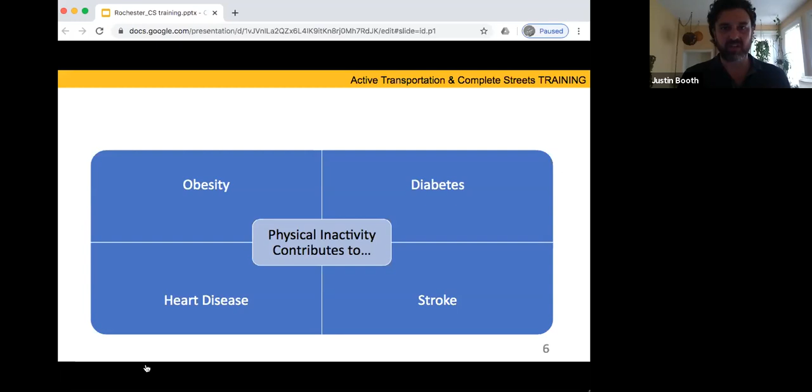We do know that across the country and here in New York State, obesity continues to be on the rise. And when we talk about complete streets, oftentimes the argument about why we can't do it is because of cost, and we focus on the direct cost of building a roadway. But when we look at the indirect costs of how we design our environments and how it's affecting people's health, the New York State Comptroller back in 2011 did a report about the direct and indirect costs of overweight and obesity in New York State, and determined that childhood obesity is costing New York State $327 million in direct and indirect medical costs. And when you look at adults, that number jumps to $11.8 billion. So there's a direct benefit for us to really design our streets for all people.

When we take a look at the way people are traveling, we know that commute times are certainly increasing, oftentimes due to congestion. But we know most of our mode share in New York State is done by car. Here in the city of Buffalo, there was a survey done by the Business Improvement District downtown that determined that 88% of the trips made into downtown Buffalo are done in a single occupancy vehicle. And of course, trying to accommodate all those cars every day as we continue to grow and our downtown starts to rebound becomes more and more challenging. Competing interest for space and resources, whether it's on the streets or off street for parking, can really have a negative impact on our community.

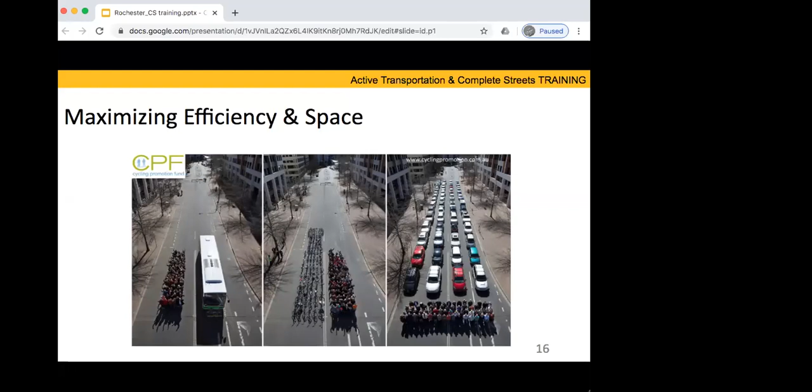However, that metric doesn't take into account people, just vehicles. So that metric will account for a bus carrying 30 to 50 people the same as a car carrying one person. When we think about the spaces devoted to vehicle travel, what we need to start thinking about, and what we've seen communities around the country and the globe thinking about, is how we're maximizing the efficiency of the space on our streets to move more people through our corridors, as opposed to just moving more cars.

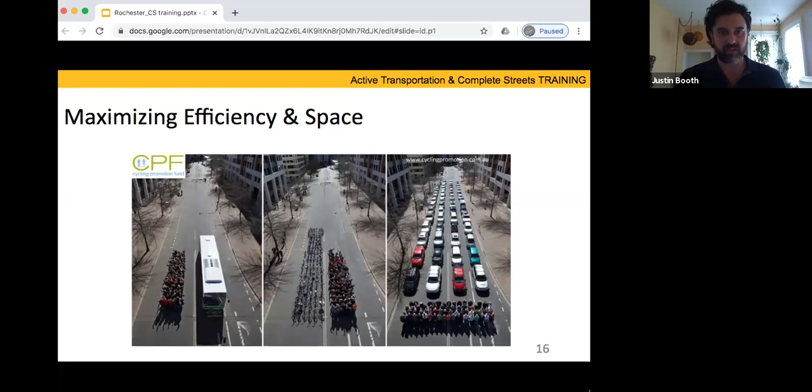Of course, one of the biggest challenges we see in all our communities, and a place where we need to put a lot more effort, is the impact of transportation on climate change. Transportation accounts for 34% of New York State's emissions, more than residential, commercial, industry, and waste combined. When we think about transportation's impact on climate change, it's a three-legged stool: vehicle efficiency, fuel content, and vehicle miles traveled.

While we're making progress with electric vehicles and fuel efficiency, vehicle miles traveled continues to climb, because the way we've made it more accessible and convenient to drive drives people towards that mode and reduces demand for other modes, where many of our communities are looking for a much larger impact from so many other options.

We also need to consider equity in our planning. I know in many of our communities there's upwards of a third of households that don't have access to a vehicle. How are they getting around? Think of a family with a household income of only $30,000 a year, with AAA having the average cost of owning and operating a vehicle close to $9,000 a year. That's a significant portion of household income going towards transportation.

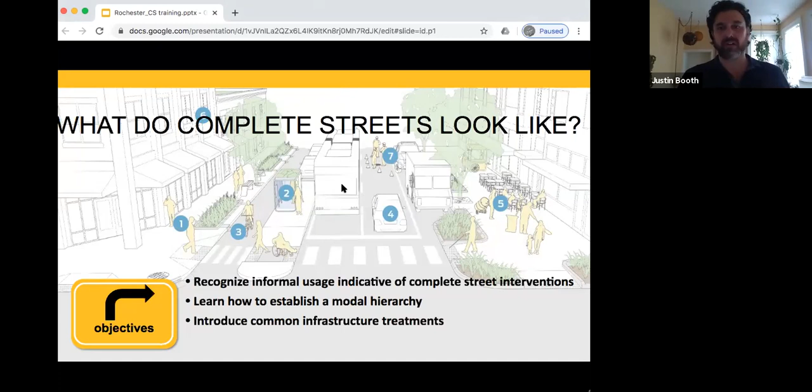So what do complete streets look like? We're going to look at recognizing informal usage indicative of complete street interventions, learn how to establish a modal hierarchy, and introduce common infrastructure treatments.

Whenever we go out and look at a community, we need to recognize patterns. It's so important to observe the environment and how people are interacting with it. Are there goat paths? Is there a sidewalk adjacent to the street, but a worn dirt path set back from it because it's in a splash zone? Are cyclists taking shortcuts around certain locations because while there may be a bike lane, the intersection it crosses may not be the most comfortable or safest to get through?

Is there a community interest in a path or street treatment? Has the community been asking for a crosswalk or a pedestrian signal at the location? Many times there needs to be a certain amount of pedestrians to warrant having those in place, but if it's unsafe to encourage people to actually walk there, it's very difficult to justify adding some of those.

And of course, where are the kids going? Where are they hanging out? Where are their destinations—the playground, the school? And how are we supporting safe travel for them?

When we think about complete streets, I like looking at it as the 3 Ps: projects, policies, and programs. In projects, we want to develop and build an environment that supports all modes. So many projects, whether large-scale infrastructure or quick build projects like painting bump outs and crosswalks with neighborhood groups, really make an immediate difference in impact on street safety.

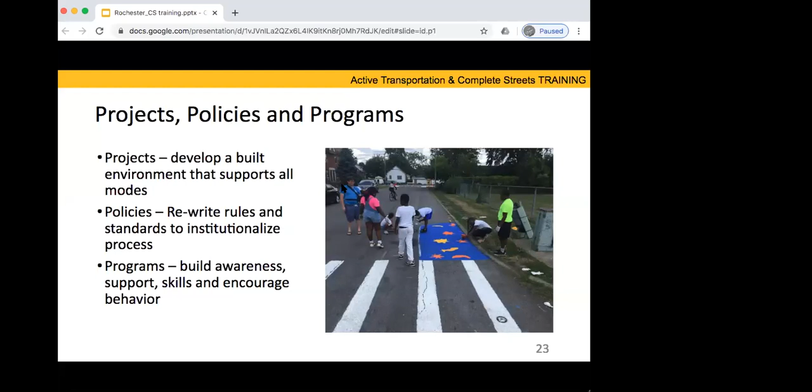What policies are in place to make sure we institutionalize these processes to support all modes of travel on our streets? It's also important to build awareness through programs, encouraging correct behaviors on the streets, educating road users on new treatments being put in place, and encouraging correct behaviors.

So correct design invites the correct use. This is from Clyde, New York, if anyone's been to Wayne County. These streets run parallel to each other—one had investment from a TAP grant to do complete streets interventions, and the other was just repaved. You can see through these images the street widths are exactly the same, but simple elements such as street trees, light posts and signage, high visibility crosswalks, and ADA ramps really shrink the perception and encourage cars to travel at the speed limit.

Whereas the image to the right just looks very wide, like you could land an airplane on it, which really encourages vehicles to speed. So how do we clutter the environment in a way that changes the perception of drivers and encourages the correct use?

This image is from Lake George, upstate New York above Albany. We did a workshop in Lake George a number of years ago, and this is the roadway once you get off the thruway coming into the village. The speed limit was 50 miles per hour. It was a 4-lane roadway. The sidewalks were immediately adjacent to the road. I was staying right there at the Fort William Henry Hotel, and for dinner I had to run across the street as carefully as I could to get to the restaurant.

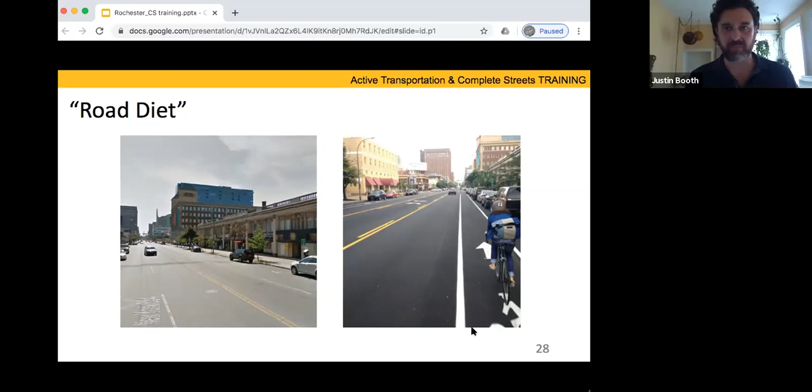So maintenance projects can provide a significant opportunity to make some low-cost changes on our streets that are going to have a significant impact on safety.

In many of our communities, we're starting to see the implementation of protected bike lanes. The image I showed you before of Delaware Avenue had the bike lanes on the outside of the parking. Instead of using bicyclists to protect parked cars, many communities are now using parking as a way to protect cyclists. It's a shift in the way that we design our streets and has some additional design considerations.

When we think about inducing demand for other modes, we know that 1% of the population are what we would consider strong and fearless cyclists - people like myself that are going to ride on any street year round and take the lane, more vehicular cyclists that are out there. Bike lanes are going to attract about another 7 to 8% of the population by providing that safe designated space.

However, if we really want to make a significant difference in terms of changing mode share, improving public health, and some of the other benefits that we talked about with complete streets, protected bike lanes have shown to attract upwards of 60 to 70% of our population, making it safe for families, for children, and have really demonstrated an increase of safety of upwards of 90% in the communities that have measured the impacts on these streets.

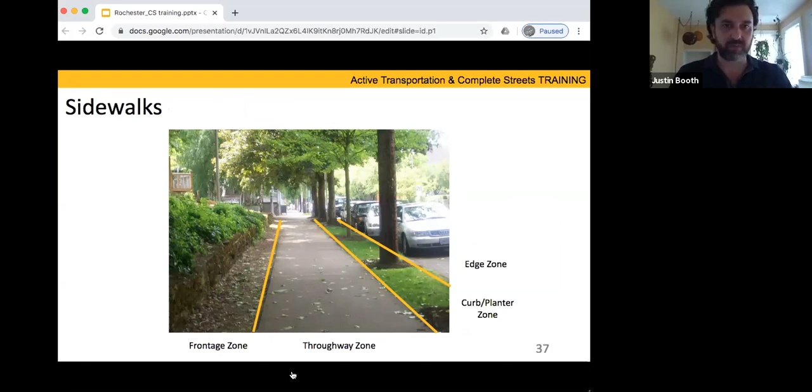Curb extensions are a key aspect of shortening crossing distances for pedestrians. It's New York State law that vehicles can't park within 20 feet of the crosswalk, but without curb extensions we all know vehicles will park wherever they can find a spot, which often reduces the ability for drivers to see pedestrians at intersections and makes it difficult for people to cross the street. So curb extensions are a great treatment, whether at the intersection itself or mid-block, slowing vehicle speeds down and creating sight lines and improved visibility at the intersections.

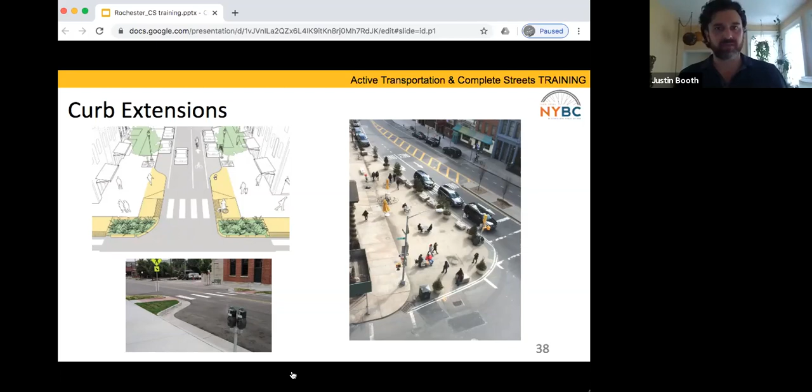High visibility crosswalks are incredibly important, making sure drivers know where pedestrians should be crossing and that there's a clear zone for them to do it. Sometimes in communities they can be enhanced at nighttime with crossing beacons or in-pavement lighting. High visibility crosswalks with the ladder bar pattern are incredibly important to improve the crossings at our intersections.

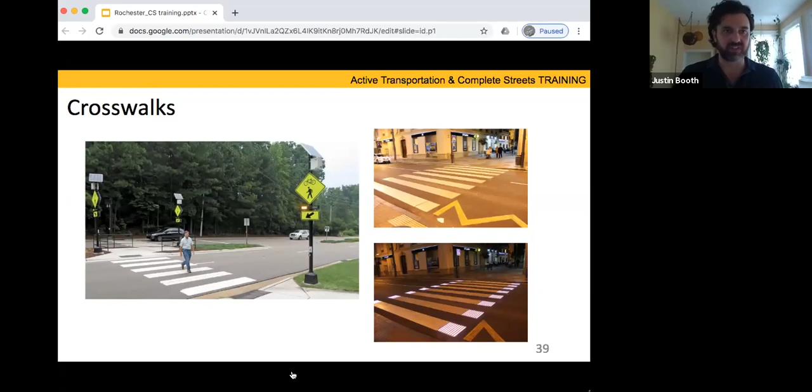At schools, the rule in the past used to be putting bike racks off to the back near the dumpster so they aren't seen, which is usually the worst place to put them because that's the easiest location for bicycles to get stolen. So we're seeing many schools now put bike racks up close near the entrance of the school, which lessens the likelihood of vandalism or theft occurring.

And of course, ADA accessibility, making sure that we're accommodating all users on our streets, people that are mobility impaired, making sure that we have correct corridor design, grades and slopes that support all people, appropriate sidewalk surfaces. We have truncated domes at intersections for people that are visually impaired, with appropriate curb ramps and other pedestrian crossings in place.

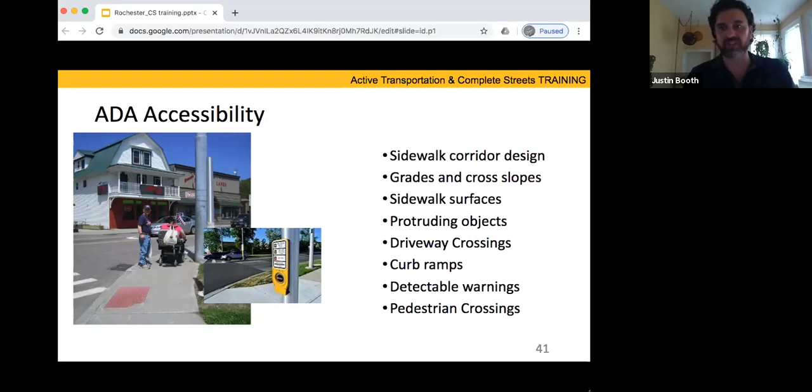And of course, never underestimate the opportunity to be creative in our streetscapes, adding public art, placemaking, and creating that flair. I think one of the best treatments I've seen or experienced was in a community called Fremont in Seattle.

On their main street in their business corridor, they put in bronze dance steps. As we were taking pictures of these great public art pieces, an elderly couple walked up and just started following the dance steps put in the middle of the street, just for fun, right? Our streets are places to interact, places for public art, places to build character and community and quality of life. So utilize these aspects to your benefit when looking at streetscapes, to make them more comfortable and attractive for people to use.

The city of Rochester has done a great job of doing some really creative public art in our intersections themselves. And I think that's a model that other communities have strived to do as well, utilizing our streets as a public space that is not just for movement of people and goods, but also for creating that sense of place.

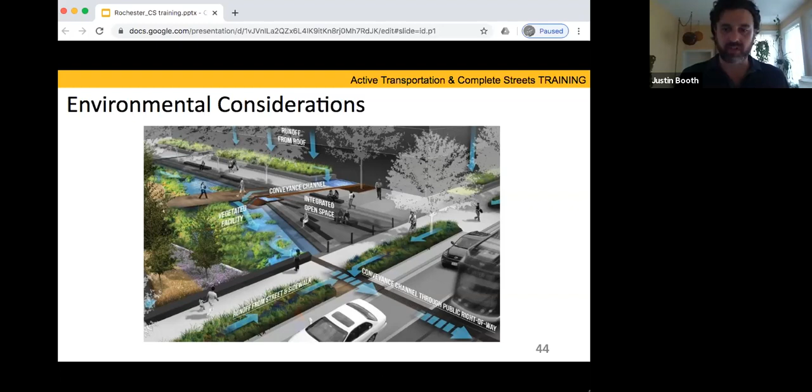Environmental considerations: making sure that there are opportunities where appropriate to capture our stormwater, whether through rain basins between the street and the sidewalk, or other opportunities such as porous asphalt, or using plants to absorb the water as much as possible, so that during large rain events we can prevent pollution running into our water systems.

So there's lots of resources out there, and I would highly encourage all of you to take a look at the National Association of City Transportation Officials. They've developed quite a few design guidelines, and most recently came up with another guide called Don't Give Up at the Intersection, looking at bicycle and pedestrian infrastructure at intersections, new treatments like protected intersections for both cyclists and pedestrians, which a couple of communities have been implementing. AASHTO has developed a guide for development of bicycle facilities and protected bike lanes, and there's constant work and studies funded through the New York State Energy Research and Development Authority, with examples we're seeing across New York State. There are quite a few resources out there, and we can certainly share some of the ones we use most often with all of you as a follow-up.

I'm missing some of the elements of the slide.

Integrated transportation systems. One of the things I think is important is that sometimes we silo different modes in their own spaces, whether it's vehicles, transit, bicycles, or pedestrians. What we're really trying to look at is how do we integrate our systems together. How do we encourage more people to use public transit when we know that the first mile, last mile is probably a critical factor in whether someone's going to take public transit? Is it safe to walk to that bus stop or transit line?

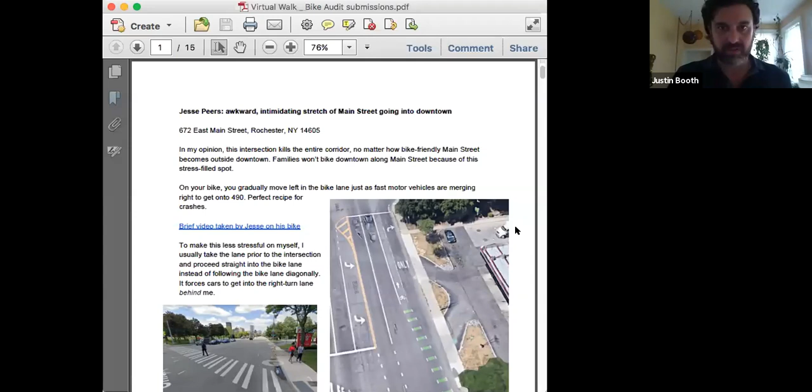So Jesse, you've compiled these and articulated some opinions on the impacts or challenges of some of these locations. Do you want to introduce this first one here at 672 East Main Street?

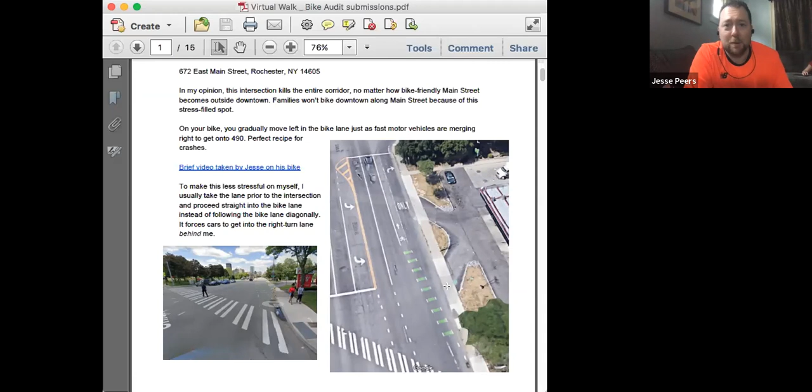Sure. So the default east-west corridor for people getting into and out of downtown is Rochester's Main Street. Gradually we are seeing some improvements, particularly between Culver and Goodman. We're going to see a great cycle track that'll be constructed soon. But this little piece right here going towards downtown from the city's east side, to me, it kills the entire corridor. It's a very weak link. It's very uncomfortable, and I use it a lot, but I'm never comfortable there. I can only imagine other cyclists having a traumatic experience here and vowing not to bicycle ever again on Main Street.

But as you proceed into downtown, you see that bike lane with the dotted green stripes that has you gradually move left just as faster motor vehicles are trying to merge right to get on the inner loop there, 490. So it's a really stressful spot. To make myself less stressed, I tend to take the lane prior to the intersection and proceed straight, which forces drivers to merge over behind me rather than in front of me. But it's just a very weak link, and no matter how bike friendly Main Street becomes outside this space, I worry that this weak link will just deter people from biking down Main Street.

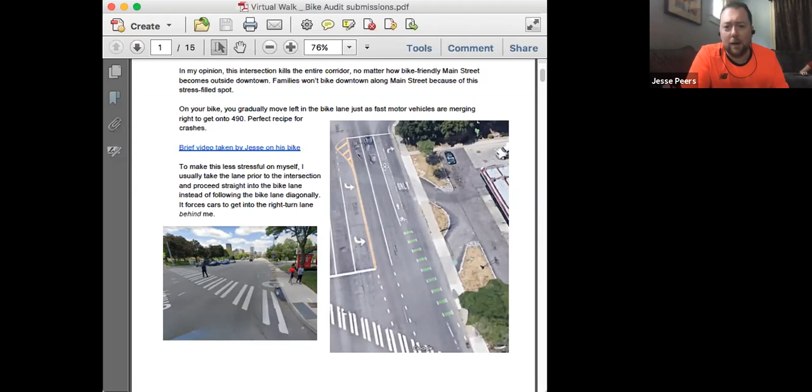Has anybody else had similar interactions with this intersection, or have some suggestions of how to make it better?

Jim Pond here from Monroe County DOT. That's a relatively new installation, as you probably know. So in order to understand that one, we have to back up a block to see what's in the preceding block, to see where that's coming from out of a bus stop and so forth. So Jesse, this is a difficult spot to do as a system, because if you move the bike lane over prior to that, then you're hung out in the middle one intersection earlier. So I'm not sure how to fix it, and I understand exactly what you're saying, but it is a difficult spot to work with. This was put in on a resurfacing project, so they had to stick with the same curb width—they couldn't bump it out and open up the right turn pocket, which probably could have made it more like what you're looking for.

Jim Jones, can you maybe talk about some ideas? Thanks, Justin. Let me turn my camera.

Yeah, this is actually the recommended treatment where the bicyclist continuing straight takes that space, and this conflict zone is there. It's part of that conflict, but I don't really know a good way around this. I don't know what the right turn volume is. I'm assuming if there's a dedicated right turn lane, then it is warranted.

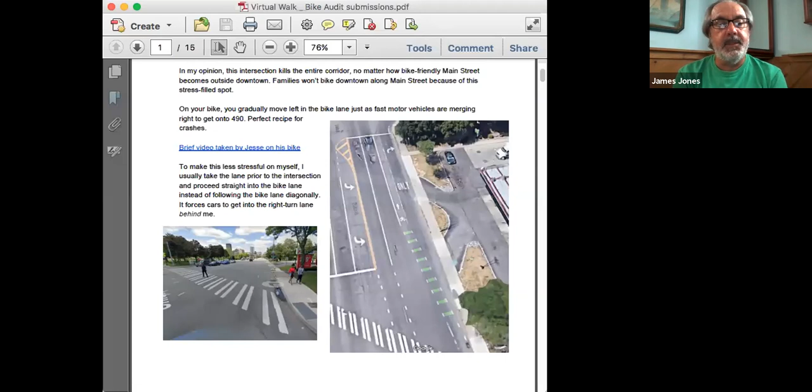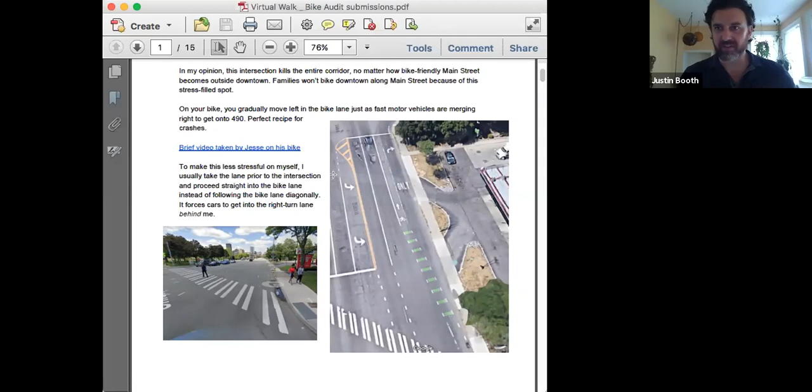Any other comments on this first walk bike audit piece? All right, I'll move on to the next one. Jesse, this is also your submission.

Yeah, so I bike with my kids all over the city, to Little League baseball fields, to the library, to museums, to parks. And we love bicycling to Rochester Red Wings games. I look forward to having minor league baseball again. But it's always very stressful getting to the baseball park, particularly because of State Street.

And I just wanted to draw attention to the tweet there in the middle of the page, which is a very common experience that people have. And the tweet says, 'Oh my God, my daughter just called from an intersection crying. Bike lanes ended. She took the lane, but it was too busy and intimidating to turn left. Cars were honking, people yelling at her. She vows never to ride a bike again. Wife has gone to get her in the van. Hashtag gutted.' And that's just a very common experience.

I know people that I feel kind of guilty about because I encourage them to bicycle. They had a traumatic experience like this, and they're very reluctant to try biking again. And Andrews Street getting to State Street in Rochester is just very uncomfortable. I would love to see a family-friendly way for people to get to Frontier Field.

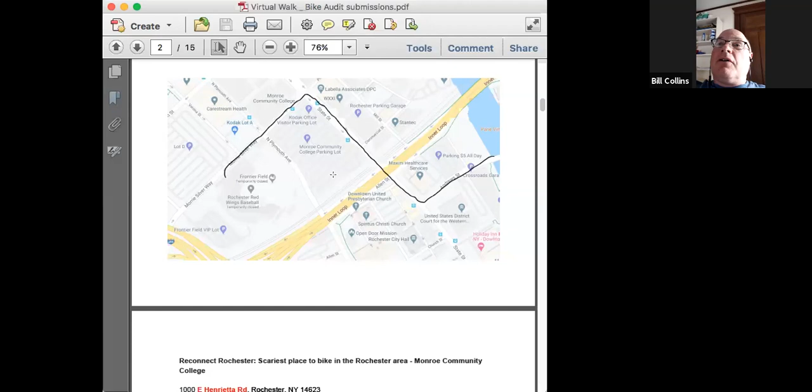Hey Jesse, this is Bill Collins. I guess if I was doing that route, I would go up St. Paul instead, and then go across the pedestrian bridge, and then straight over to the field from there. Just State Street and Lake Avenue in general is just a horrible place to bike. And I don't know, since it's a state highway, we've had very severe problems getting the state to change it or reduce the width in any way. So I don't know what the solution, if there's any solution to State Street at this point, State Street and Lake Avenue, except to avoid it, which is what I do constantly.

Yeah, it's such a contrast to Andrews Street, which is so bike friendly. If people want to go through or around downtown, I always recommend Andrews Street. It's relatively low traffic, they've got bike lanes, and there's some beautiful vistas of the city skyline. But when Andrews ends and you get to State Street, it's like, oh crap, totally different experience. So yeah, it's a tricky spot.

Yeah, this is Scott MacRae. Justin, are you going to talk a little bit about signage? Because identifying bike-friendly streets or pathways for people not so familiar with the navigation can be really helpful. It seems like an area where we could really benefit a lot for relatively little dollars.

Yeah, that's certainly a good point, Scott. Getting some of that low-hanging fruit options, signing some of those better routes, encouraging a safer route until we can make some of these longer-term improvements along these corridors.

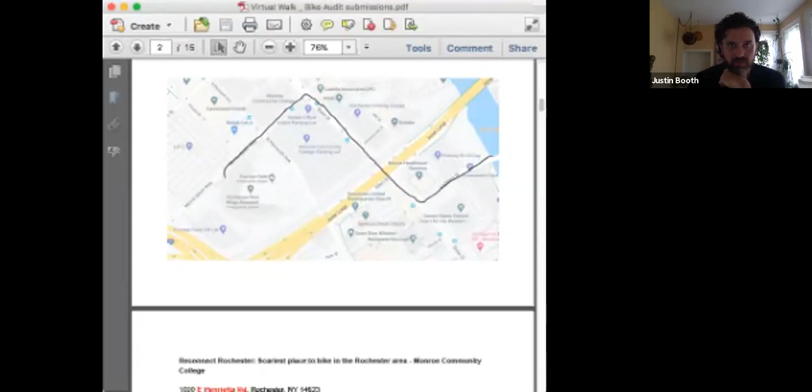I'm going to switch over to Google Maps real quick. For those of you who aren't familiar with the intersection or location we're talking about, if we can—beauty of Google Maps. So it's certainly, am I in the right location? Yeah.

So what we can see here, do we know what the traffic volumes are on State Street? Not enough, fast, busy. It looks like, the intersections themselves, we're looking at 4, 5, 6 lanes of traffic roughly that you would need to cross to get across State Street. You've got a large parking lot at this location at State and Commercial across the street. Not knowing the area as well as some of you, this really looks like a location that's facilitating vehicle and vehicle speeds.

And so this is also often the challenge, right? If the volumes are below, say, 15,000 AADT, that's typically the threshold where state DOT, according to the state's complete streets policy, will be able to do a road diet. So sometimes it's, do we want to continue? Part of it is, are we going to make a conscious decision on some of these corridors to reduce traffic volumes or inhibit traffic volumes and really focus on other modes?

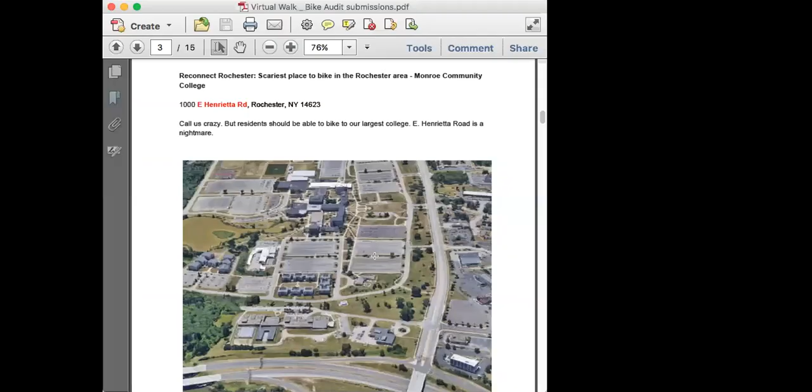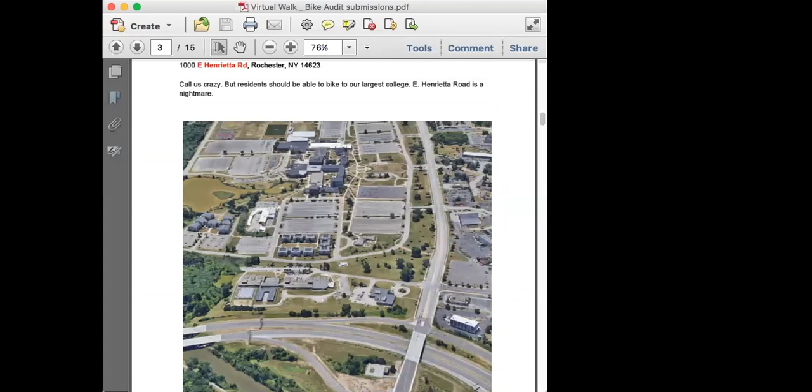All right, Jesse, this was also a Reconnect Rochester submission. Yeah, so going from one MCC campus to the other, the Rochester Cycling Alliance has for over a decade been getting a lot of complaints about East Henrietta Road, where the Monroe Community College campus is. It's our metropolitan community's largest learning institution, and it's harrowing to get there on a bike. East Henrietta Road is just very uncomfortable, very wide, with lots of traffic.

There's a 390 exit ramp and entrance ramp right there. I know cyclists that go through that intersection all day—they typically have to dress like a radioactive My Little Pony and wave their arms and yell and scream just to make themselves feel seen and heard. And again, it's our community's main learning campus, not that far out of downtown. I know people would bike to it, but not on East Henrietta Road.

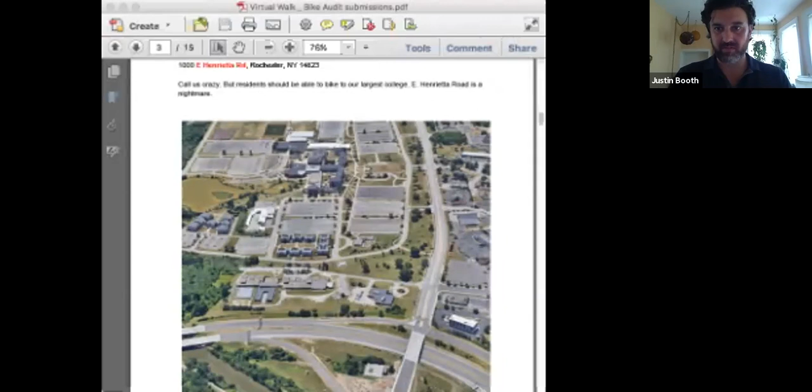Is there any projects coming up for East Henrietta Road? Do we know of any? So I'll pull up and share screen. Depends on where you are on East Henrietta, but I think the stretch south of 390 was rebuilt about 8-9 years ago with bike lanes, though it's wide. They're doing work just inside the city limits on East Henrietta Road now, between 390 and Westfall, to add bike lanes.

You're down south of here—that was 8-9 years ago, so it's probably not due for a project for a while. There are bike lanes there, or shoulders—I'm not sure, I think they're just provided as shoulders, but it's wide.

Yes, I pulled up just the entrance to the school. Again, 1, 2, 3, 4, 5 lanes of traffic. I presume the speed limit's 30 miles per hour, but probably speeds exceed that. It's 40—yeah, it's 40.

I think one of the questions asked of us to cover was the 85th percentile, and for those that aren't traffic engineers, that can sometimes be a little confusing. So, Jim Jones, I'm going to ask you to give your take on the 85th percentile and how it works or doesn't work.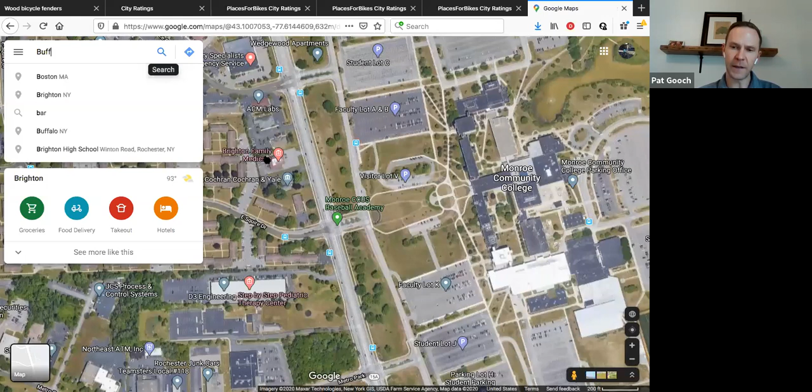Yeah, I think this is a great opportunity, and we need to do this along all of our campuses in the SUNY system. They often have large front lawns that are just grassy areas and could be a great two-way cycle track facility. Buffalo, New York was fortunate to do this with Buffalo State College along Elmwood Avenue. The same type of thing could be done here, even for a short stretch. I think we need to think bigger than just an on-street bike lane—we need an off-street facility that will be top-notch. I'd encourage people to think a little bigger on a project like this, especially when there are state facilities that we all pay for.

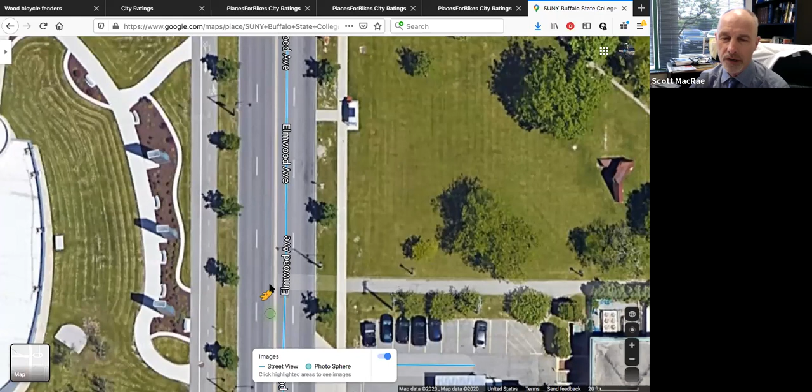This is Scott MacRae. Just a quick comment—Jesse kind of nailed it when he talked about the sort of armored pathway you need to get across that expressway. This is a really common problem of pinch points where there's an expressway entrance, and I find they're the most dangerous because drivers aren't thinking about pedestrians and bicyclists popping up when they're trying to enter an expressway. The intersection at 390 and East Henrietta was just redone, but it was window dressing from a cyclist standpoint—it's not at all friendly.

When you have those pinch points, even if you do a great job on the Monroe Community College campus, it's very difficult to get across. I live not far from Culver, at the intersection of Culver and 490, and that's another pinch point. There's a wonderful park right there, and it's very difficult and actually dangerous for pedestrians because people are always coming off that expressway looking left while there's a pedestrian on their right—they don't see them, and you have to be very careful.

Do you want to talk a little bit about pinch points? It would be a major work to somehow separate bicycles. We talked about having a little underpass, separated, that John Schull proposed for that intersection to get to MCC, but that's a pretty significant infrastructure investment.

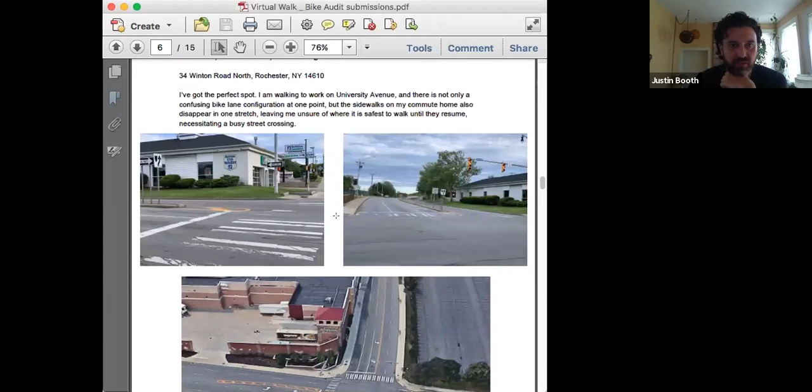All right, we'll go on to Robin Wilt from the town of Brighton. Are you available to speak on this location? We have Robin on the call.

So Robin stated: walking to work on University Avenue, there is not only a confusing bike lane configuration at one point, but the sidewalks on the commute home also disappear in one stretch, leaving me unsure where it is safest to walk until they resume, necessitating a busy street crossing.

And so we could see the overview of this location. Obviously, I think one of the key aspects here is that you've got the land use, you've got the three intersections where you've got buildings up to the street wall, but also a significant amount of parking on the upper right-hand side of the bottom image. Number of lanes to cross, despite having high visibility crosswalks. And I think something important to take a look at is the curb radii. One of the things I often find challenging in intersections like this is it facilitates cars taking right-hand turns on reds, unless there's a signal in place. So as a pedestrian tries to cross, it makes it even more challenging to get across the street when cars are making that right-hand turn.

So again, I'm going to turn this over - anybody else? Jim Jones, can I ask you for a couple thoughts on this? Yeah, so this is the traditional approach to an intersection or a project: widen it, provide exclusive turn lanes, but we're only looking at benefiting the vehicle, the automobile. So there's a competition here for safe pedestrian access, and there's no accommodation for bicycling here at all.

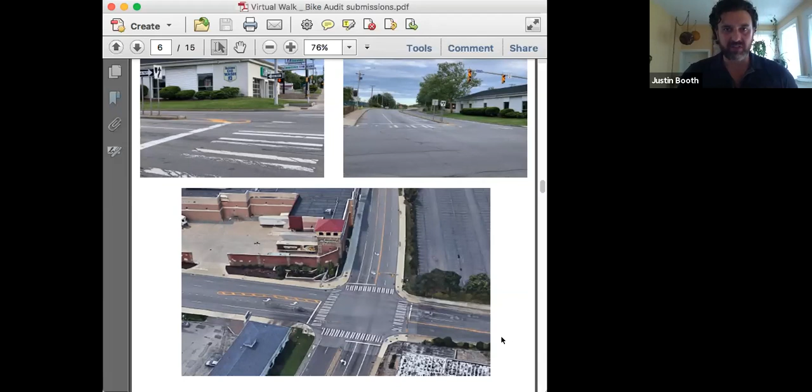I do recognize, I saw at the bottom image that there is a bike lane going down there, but I didn't notice it connecting to the end. It doesn't really seem like any of the locations there necessarily connect to that bike lane, nor are any accommodations made at that intersection for potential cyclists. The sidewalks that exist look fairly large, but I can imagine not necessarily comfortable to walk down, considering there isn't a buffer between the sidewalk and oncoming traffic. And with the volumes I presume are there, it could often be just not comfortable.

So again, thinking about our roadways and how we're accommodating pedestrians and cyclists, providing a sidewalk is great, but if it's not comfortable to walk on, we see this many times - we won't see anybody actually utilizing it. And so that's something we need to address.

Yeah, it looks like, Justin, there is a two-way center turn lane there. That's another common legacy approach to providing that factor of safety or accommodation for turning vehicles. But there you're sacrificing 12 feet probably that could be provided to bicycle facilities.

There's no sidewalk on the lower left corner there - it's all green lawn. So there's no sidewalk there, and the sidewalk on the other side of the street looks very narrow, and there's no snow storage. This has been widened probably to accommodate that left turn center lane.

And those, in certain contexts, especially in an urban context, I would hesitate from their use, because they do take away from the bicyclist's opportunity and the pedestrian, and they increase crossing distance and crossing time. So then you've got to adjust your signal timing for those additional pedestrian calls.

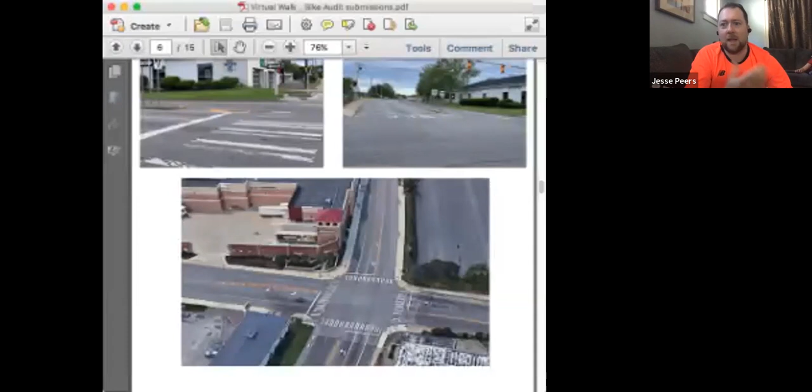Robin was also drawing attention to the fact that the bike lanes disappear prior to the intersection, and I know even the League of American Bicyclists up to pretty recently had advised municipalities to make bike lanes end prior to intersections so that cyclists could merge over into regular traffic. Justin, can you talk very briefly about right hooks and left crosses and what's being done around the country to prevent right hooks and left crosses?

Yeah, I'd be happy to. I think the best guidance I've been seeing is really coming from the National Association of City Transportation Officials, their guide, Don't Give Up at the Intersection. I'm in the process of pulling it up right now. I'll share my screen with you all.

But again, it really looks at how do we make our intersections safe to reduce those conflicts, which can be so detrimental, and really be the place where we lose our access at the intersections. So I'm just going to stop sharing on that one.

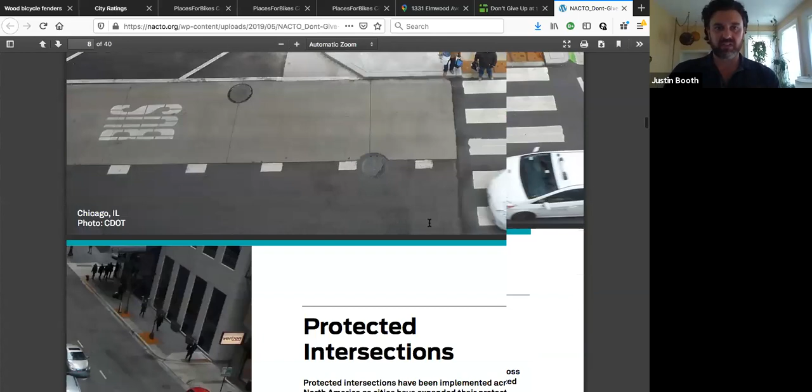So this guide does a lot. You can see here the little island that is used to change the radius of the intersection for vehicles. That's really the key component to this. So it's essentially thinking about putting out a bump out, but only doing the small little piece of it as a way to provide the through traffic for all modes.

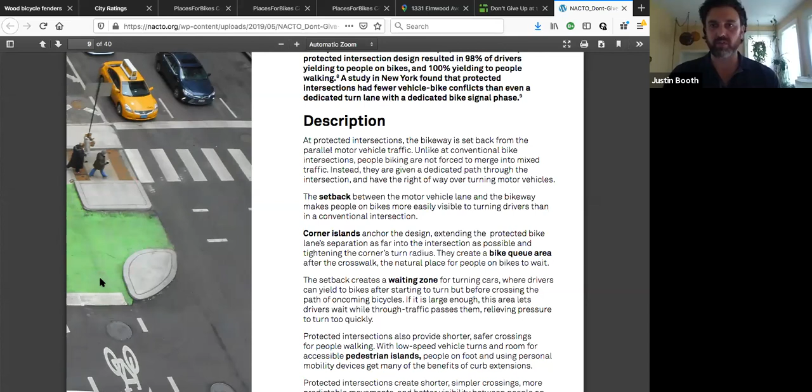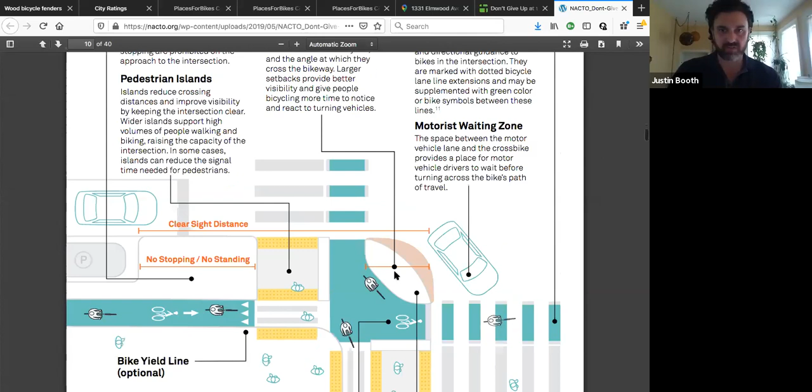They give really great guidance in terms of the stopping, the standing zone, pedestrian islands, the bikeway, setbacks, crosswalk markings, the motorist waiting zone, which is incredibly important. It's all about making sure we provide clear sight distances for all users at the intersection. It makes a significant difference.

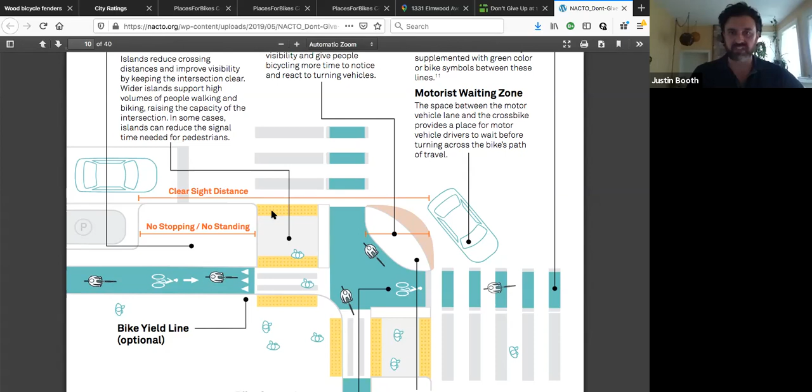This doesn't need to be all that expensive. There's a lot we can do. If we have the original curb line, a lot could be done with paint, plastic delineator posts, or maybe a small cement island that can make a significant difference at those intersections. We'll include this in some of the resources we send along to everybody.

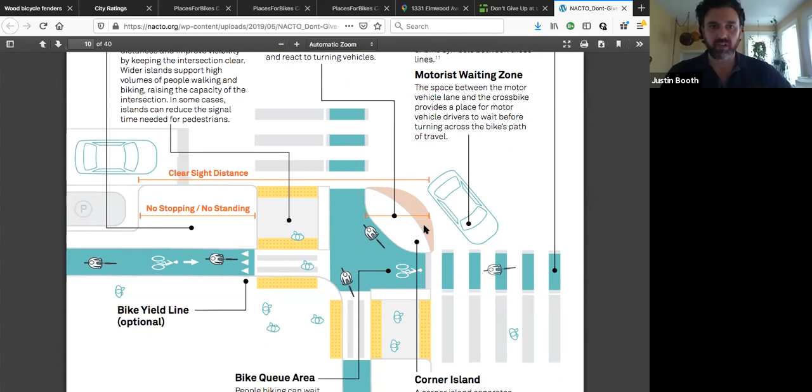All right, let's go to Patrick. You want to talk about this intersection you shared?

Yeah, so this is South Clinton and Goodman. Everyone's probably aware of it. It's a busy intersection, a lot of traffic, a lot of streets coming in at odd angles. I live just south of here, and I rarely go up north towards the Park Ave area on a bike because of this intersection. It's just not an easy place to get across, and I would imagine it limits lots of other people in the directions they choose. I know it's something that a lot of people know needs to be improved, but with the traffic volumes and other things, it's tough to do. It's just something that really would help connect parts of the city back together if it was easier to traverse.

Jim Jones, your take on this intersection? I think I know what you're going to say. But my first instinct is this is begging for a roundabout here. There's a parking lot in the lower right-hand corner, looks like there's a building in the center, lower center. A roundabout here could be considered, and it's hard to say how many lanes this is—4 lanes in each direction plus left turn lanes, so 5 lanes. I don't know what the volumes are.

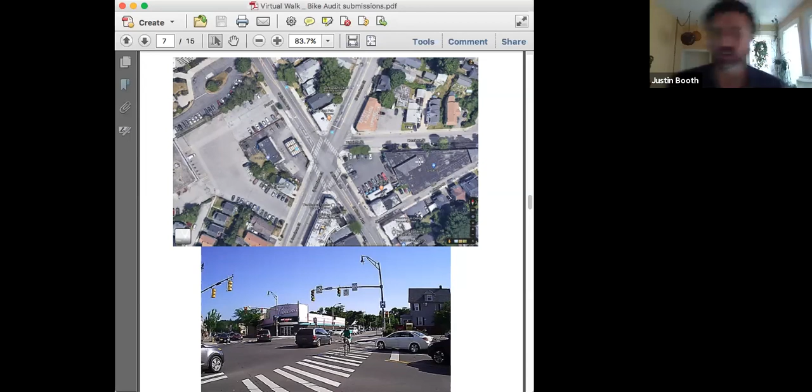So Pat, any other thoughts on this intersection, the cycling problem or opportunities to maybe improve it? I mean, if you live here, I'm sure you've had some thoughts about things you'd like to see done. Unfortunately, I don't have very many creative thoughts to solve the solutions.

The cycling problem is that it creates an area where, at least, and I'm a pretty advanced cyclist, I commute by bike most days, but I don't like to go through this intersection. I avoid it at all costs. That's the cycling problem, it creates a bottleneck and a block for me at least. But the solution, I don't see many because it's a very tight land use issue there. My main solution would be to reduce the number of lanes at that intersection and create a dedicated, protected bike lane. I don't know if that would work volume-wise, but that would be my easy solution.

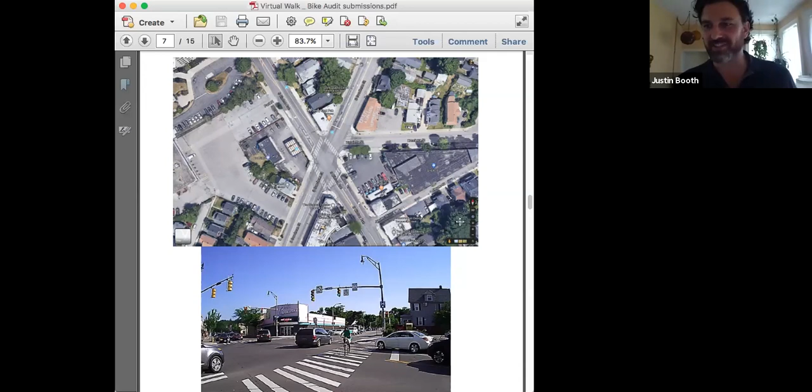Yeah, you guys gave us some really good, challenging locations to consider during this virtual audit. All right, let's move on.

Art Clayman, from Schenectady, you've submitted some spots here. Are you available to speak on them?

Is this by chance an older section? Because we don't have a Schenectady in our area. This got opened up to some folks outside of the Rochester area, so I believe this is a Schenectady, New York.

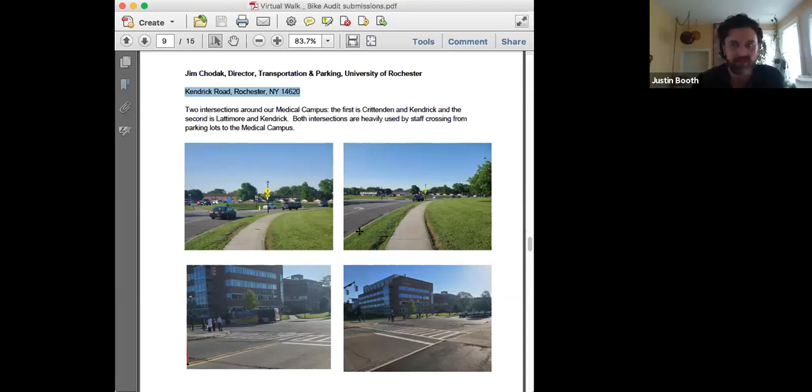Jim, we have lots of Jims today. Jim Chodak, Director of Transportation and Parking at the University of Rochester. Are you here on the call to talk about intersections around the medical campus? Jim had to jump off. This is Andrea Walton, also from the university.

I think where he was going with this - these are both intersections that come from our staff parking lots along Kendrick Road into the medical center. Both intersections have different issues. The one at Kendrick and Crittenden seems to be a slower intersection for vehicles, as there's a median on Kendrick that slows vehicles down. But there's so much volume of staff members crossing to get to the medical center that they'll do just about anything - they don't wait for lights, they just walk. There's been a lot of accidents at that intersection.

And then the other one, at Lattimore and Kendrick, is a different issue. It's the next intersection up, and vehicles speed up because they're going to turn onto 390. There's lots of near misses with pedestrians there, as there's a crosswalk right there.

I'm going to pull up the intersection at Crittenden. All right, Jim Jones, you're up.

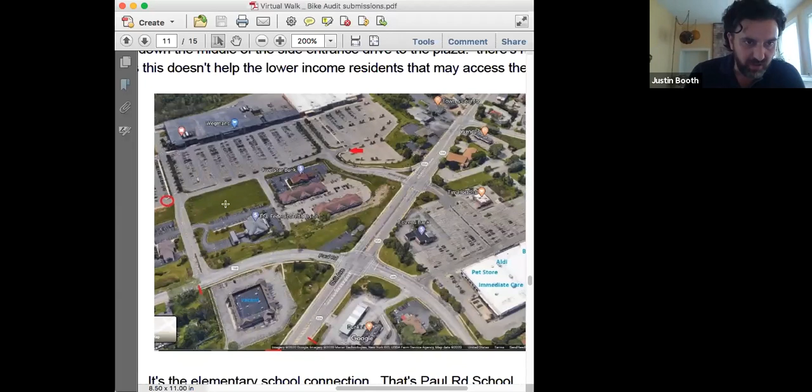Let's see if I can get that a little bit larger here. It looks like those red marks are there. So yeah, a number of challenges in this location as well.

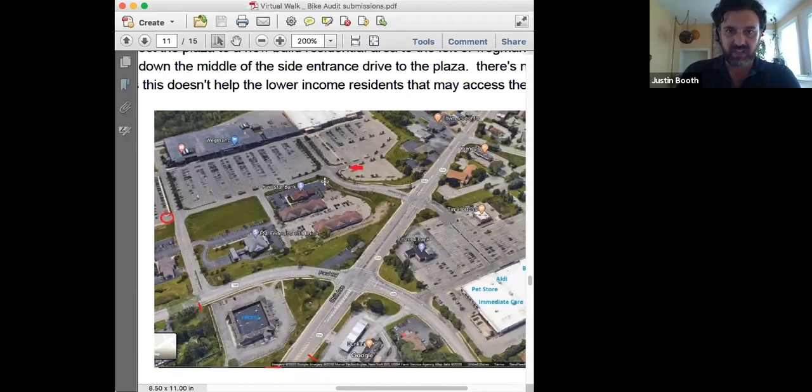I think it's important to look at the context and land use. A lot of the submissions have been primarily of a suburban nature, auto-dominated infrastructure uses, very large setbacks from the road with parking dominating a lot of these corridors, and pedestrian accommodations are some of the last aspects that have been kind of squeezed in.

Certainly not making this an attractive and safe place to walk. And again, when we talked earlier, Jim made the point of talking to our transportation engineers or public works departments, we also need to work in tandem with the planners developing our land use codes, zoning codes, and comprehensive plans.

And looking at these spaces and the opportunities in these spaces to really change the way we've built the land use patterns here, which is dominated by moving vehicle traffic, to really kind of being more pedestrian scale and pedestrian oriented for people.

So I think the land use challenges with this location and some of the others is what's driving the safety concerns. And of course, as I mentioned earlier, there are sidewalks and crosswalks provided, but it's not the priority movement or vehicle that's provided to access these locations. So I don't know, Jim Jones, do you have any other additional thoughts?

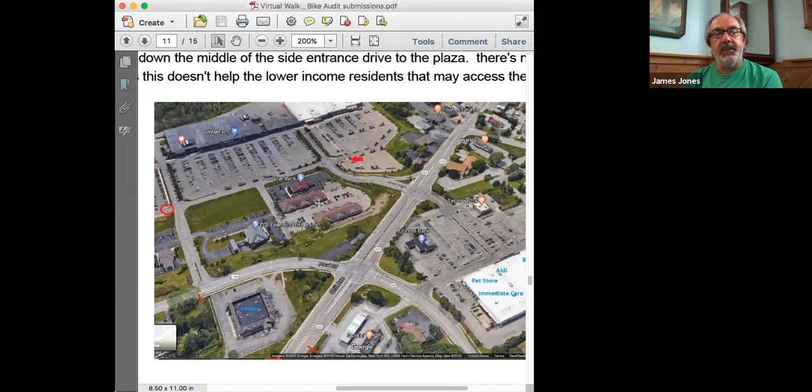Maybe it wouldn't hurt to put a bodega on the corner of your residential street, so you could have a grocery store or a coffee shop or a bakery or a butcher, so you could get locally sourced food. So it's hard to think of this just in transportation terms, because the land use here dictates everything.

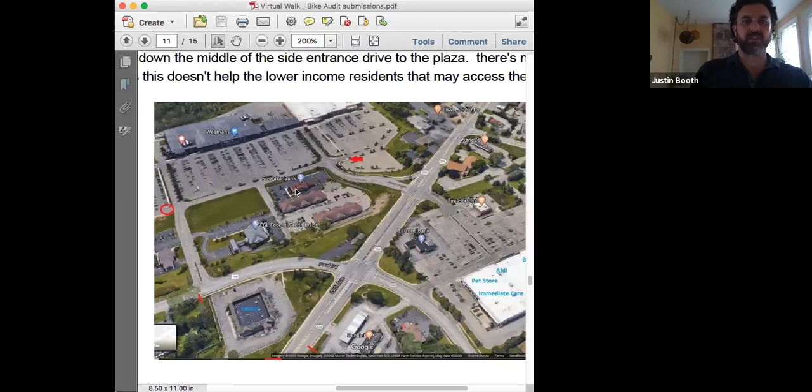Kiernan Playford, are you available to talk about your submission? This looks very similar to the one that Pat shared earlier.

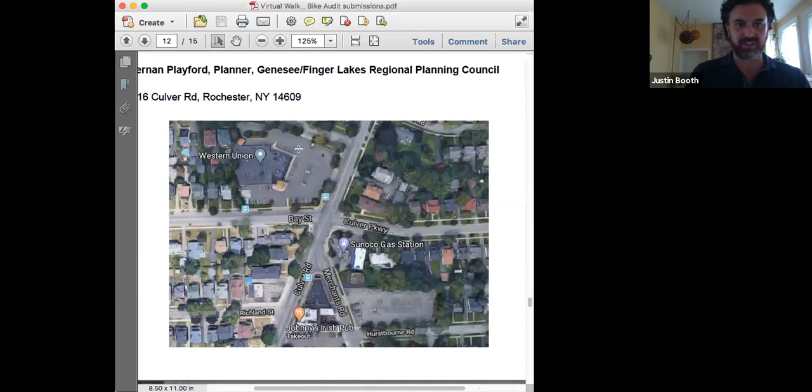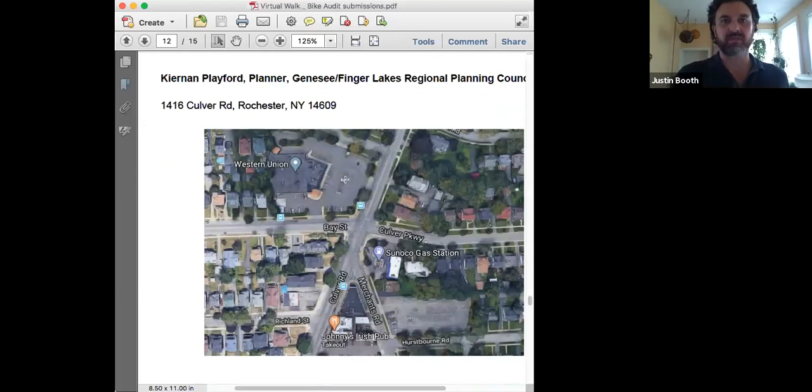Does anybody want to talk about this intersection or their experience with this location? It's another five-legged intersection—for you planners out there, it's not a good idea to design them. At least here, there's only one lane on all approaches, so that part is good. There's no road diet opportunities when you just have one lane on each approach. But it's a five-legger, and they're all signalized in the same light, so you have to go one road at a time like the other one. I'm not sure what the specific issue is on this one—do you know which crosswalk or issue it was?

Don't have any details other than the images on this one. I think from the street view, it's quite clear that there's a lack of any paint on the street to delineate spaces for crosswalks, bike facilities and the like. But without experiencing it, it seems to be missing a double yellow even down the street. I don't know how current that photo is versus what's really out there today, but it has limited crosswalks because part of it is considered the middle of the intersection. So that leg you see, you don't cross because you're going into an interior part of the five-legged intersection. I don't see walk, don't walk signals either. So you cross on three legs, but not right there because people are moving—sometimes it's the inside of the intersection. It may be bike lanes, because there are no bike lanes there. Not sure, it's not the best intersection.

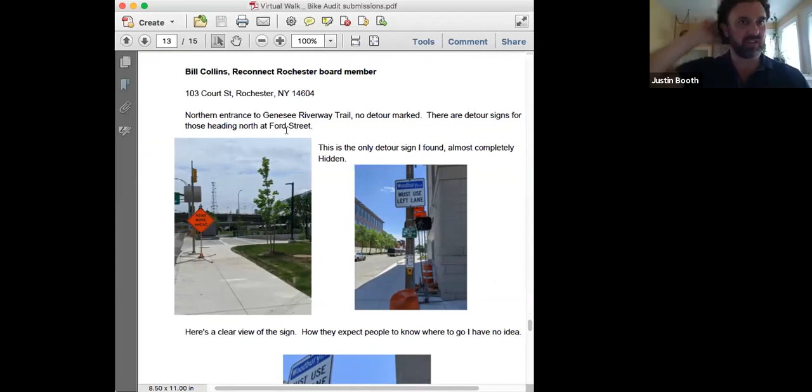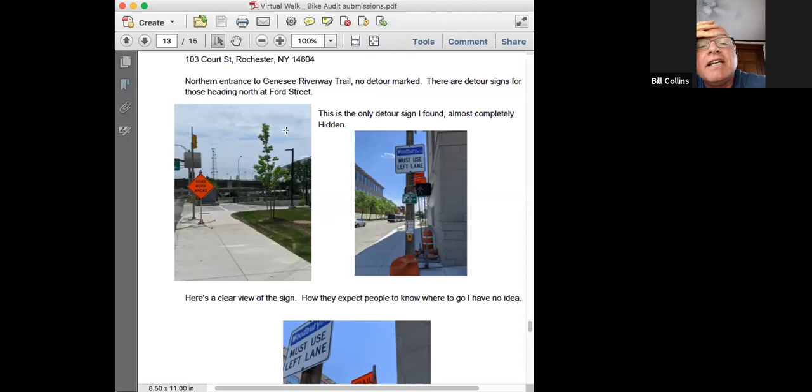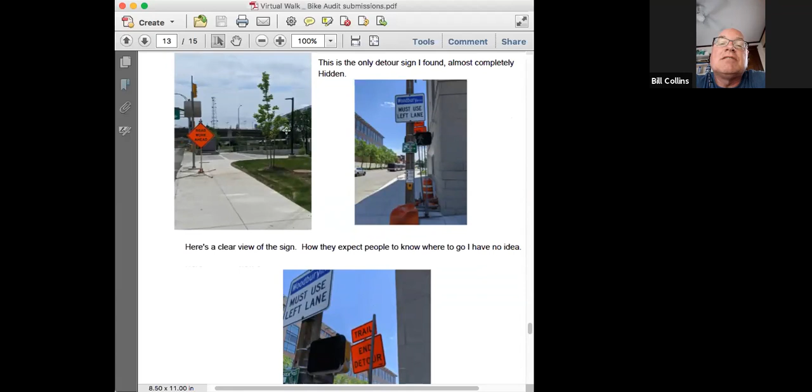Sure. So Rochester has some great multi-use trails—a little bumpy and maybe a little narrow at points, but we do have some nice trails. This is the entrance to one of them, the Genesee Riverway Trail, going from downtown running south along the river. My issue is that currently this has been blocked off because the city is constructing a skate park near the entrance to the trail.

While the city has put up detour signs for this trail to the south of the blockage, detouring trail traffic around it, there's no detour marked if you're trying to enter the trail from the north. So anyone entering from the north can't see any signage before they get to the closure, because the trail detour sign is hidden behind other signs. And once you actually see the sign, it just says trail end detour, so it doesn't appear as though the trail is actually closed at all.

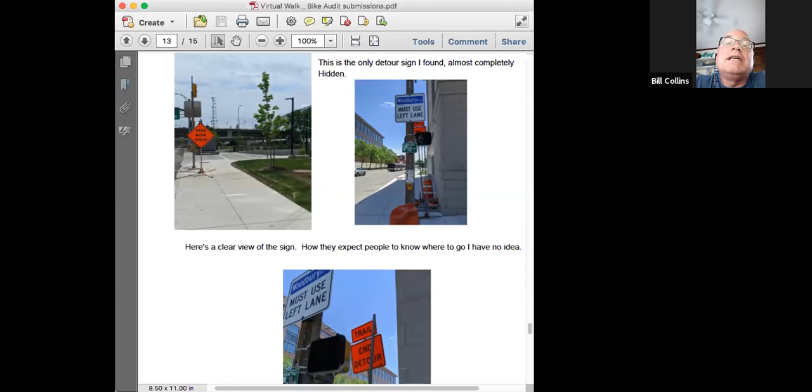So this is a signage problem, but it's especially irritating for users of this trail because it was just reopened. It was closed for a long time because construction of the building you see on the corner had blocked this off for many months. It was reopened for just about 3 weeks before construction of the skate park closed it down again.

This is important when we think about complete streets, really thinking about how they function—everything from design and construction to maintenance and detour routes, and how we're prioritizing the users of our roadways. I have never seen a construction project that didn't provide a detour sign en route for a roadway project, to make sure vehicles still had access to get around the construction site. However, I find it very rare that we're mandating, even if it's on the books, that there be clear, safe, and effective signage and detour routes for pedestrians and cyclists during construction projects.

So this is certainly a case where you go back to the city charter, the books, and see what's required to provide. This could be a very easy fix, where it's a call from the city to their contractor to remind them of the rules required to make sure appropriate safety and detour signage is provided for access to the trail. This happens on a regular basis, and sometimes a simple phone call reminder to the appropriate entity can be incredibly effective. But again, this goes back to our priorities.

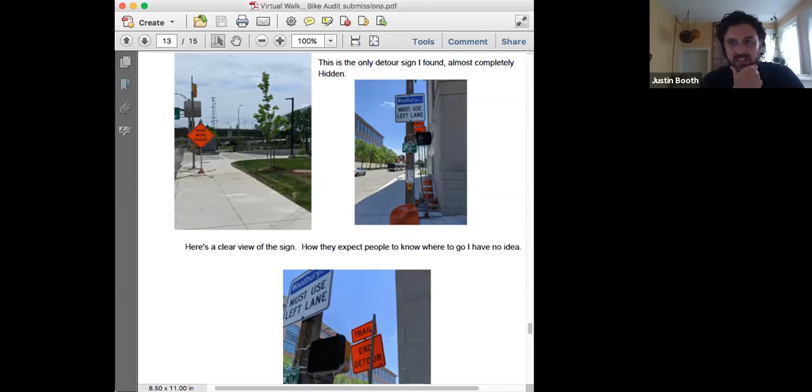I wanted to bring the detour issue to everyone's attention because it also has to do with pedestrians. I have an interesting photo of my street where there was construction, and there were signs on both sidewalks saying sidewalk closed, use other side. This happens on many downtown streets too, where a sidewalk is closed for a construction project, and there's signage directing pedestrians to cross the street and use the sidewalk on the other side. Well, pedestrians just won't do that. They will walk along the construction site on the side where they want to walk.

In other cities like New York City, they will put a detour into the roadway if necessary, or put protection around the sidewalk to shelter the pedestrians. And I think that practice needs to become more widespread.

There also should be, it's something we've gotten a little bit better at here in the city of Buffalo, at least for pedestrians. But there needs to be a constant reminder to our municipality to make sure. Often it's in the bid package for the construction company to make sure it's provided, but unless there's a regular checkup on that construction company, it's not necessarily always followed. So unfortunately, it's not always a proactive process, but more reactive. Having good advocates in our communities is essential to make sure these rules are being followed.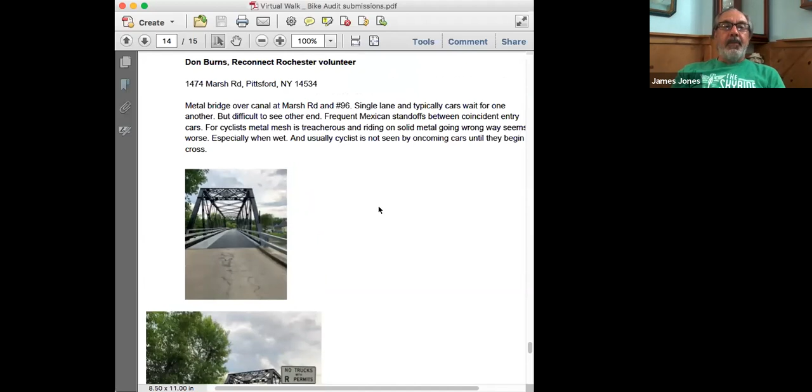I think, Justin, one thing to be mindful of for designers especially is PROWAG, the Public Rights-of-Way Accessibility Guidelines. You have to provide for pedestrian access as an accessibility requirement, and it's law. The guidelines just haven't been finalized yet, they're still in the 2011 version. However, we go back to best practices and try to do the most we can for a project. We as designers are obligated to provide that continuous passage, and the pedestrian access route has to be maintained. So that's just being familiar with the requirements, because to truncate a pedestrian facility is actually a Department of Justice matter—they could be grieved on this. So that's something to be mindful of.

We had a project in Buffalo last year where a major trail was closed because a private company was doing a replacement of their water intake, and they just closed the trail without a detour. That caused a big stir, and now there's an informal coalition of trail operators who at least have a phone tree. Back in the old days when you had a phone tree, at least you have an open conversation. So this is just changing the way we approach projects and talking to each other. You just can't close a trail off—you just can't do that nowadays.

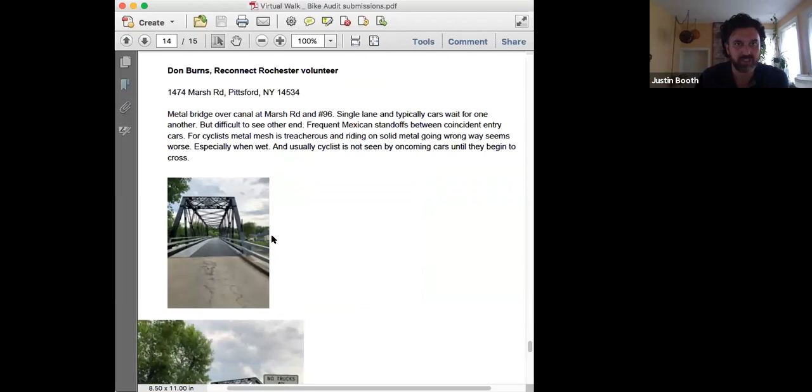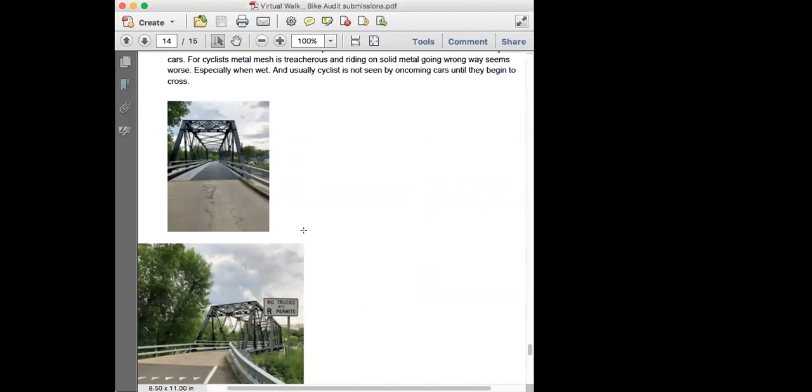Our last submission is from Don Burns, Reconnect Rochester volunteer. Is Don still on the call? I'm still here. All right, Don, you want to talk about this spot? Thanks for selecting it. It's a little bit in the suburbs—this is Marsh Road over the canal in Bushnell's Basin.

This bridge was recently refurbished by the state. One of the main problems has always been you don't have visibility to the other end of the bridge to see if a car is waiting to take a turn. The courtesy is you wait for the bridge to clear—it's a one-lane bridge, and then you progress yourself. In the refurbishment, they said they've improved the visibility to the other end, because it is kind of a blind wait. If you're a car and left-hand drive, you can see on the bottom picture, you have a little bit better view, but the layout of this whole thing is sort of like a big S, with the bridge being the center part of the S.

So it's really challenging to see if someone's entered or not. On a bike, you can see cars coming south in this lane, but you can't see the other end at all. It's a metal mesh bridge for the cars, which is treacherous on a bicycle. The pathway on the left-hand side takes you out of visibility for both ends, and it's textured sheet steel with little knurls on it.

So it's fairly easy to walk on, but really slippery to ride a bike on. I use this a lot. This goes over the canal, with canal access underneath, probably the most popular canal access between Pittsford and Fairport. The only thing I can see is either change the material on that path from steel to something else more suitable for bikes, or just get off your bike and walk across. But it still puts you in the lane of oncoming traffic.

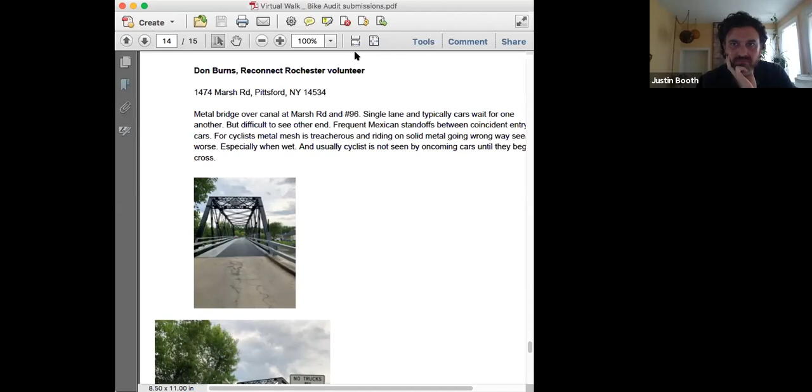Yeah, I think since it's recently been redone, the only point of emphasis for me today would be, is there an alternative texturing material for that steel plate on the left? Yeah, I imagine it is slippery when it gets wet. I've actually not experienced that, but yeah, I can imagine that's probably not very good.

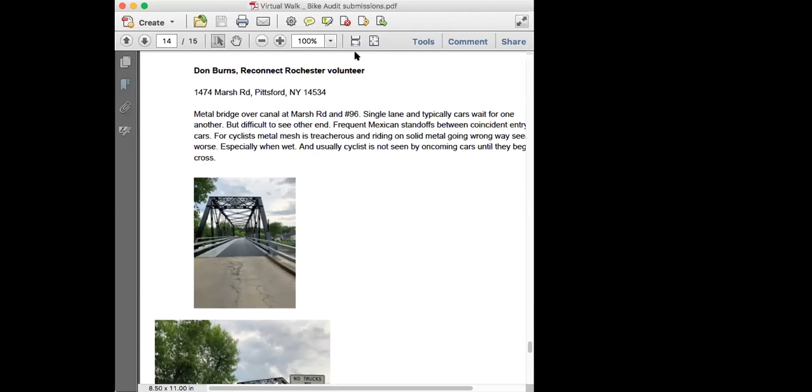It's even more dangerous for pedestrians and cyclists, it seems like. They're very close to the cars. If you're walking in one direction, you have to cross over to get to the steel plating to even walk, to get out of the way of the car.

Yeah, this bridge is so narrow, I think cars drive over the steel plate, not recognizing that was the design intent of that steel plate. But cars just feel closed in and they drive over the steel plate anyway.

Slow is good in this case, if you do have mixed use like this, so slowing the cars is the objective. In order to accommodate all the users, you'd have to replace the bridge. That'd be a new foundation, a pretty significant project.

I don't know what the daily traffic is on this. 9 or 10,000 maybe at most. I don't know. I would guess that's kind of high, 9 to 10. Okay, it's just leading to a residential neighborhood, on the north part.

But I think for the neighbors, making it 2 lanes and providing a little bit more accessibility to all modes of transportation, they feared that it would increase traffic too. That's another concern. Has a parallel bridge for pedestrians and bicyclists ever been considered?

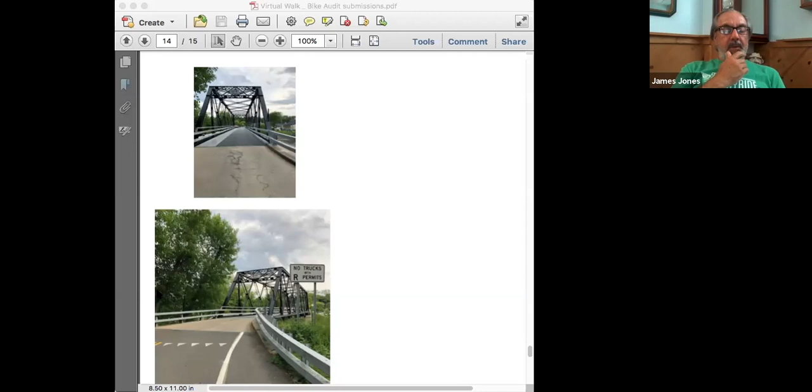I guess there's no sidewalks here, so pedestrians are in the street, walking against traffic. It's a very odd configuration for any type of active transportation leading up to the bridge. There really isn't any space, you're walking in the roadway, particularly if you have 3 or 4 people.

I don't know what the accident history is here. There's a perception that it could be better, but sometimes, I hate to say it, let sleeping dogs lie.

I put the ADT on the chat box, 3,500 vehicles a day. Oh, that's pretty negligible, that's pretty small. If you want to replace that bridge, you're probably talking 10 to 15 million. And is it worth it for 3,500 cars?

No, but your answer is from a car perspective. Right, that's really true. So the focus isn't the limited number of cars, but how do you make it safer for alternative transportation.

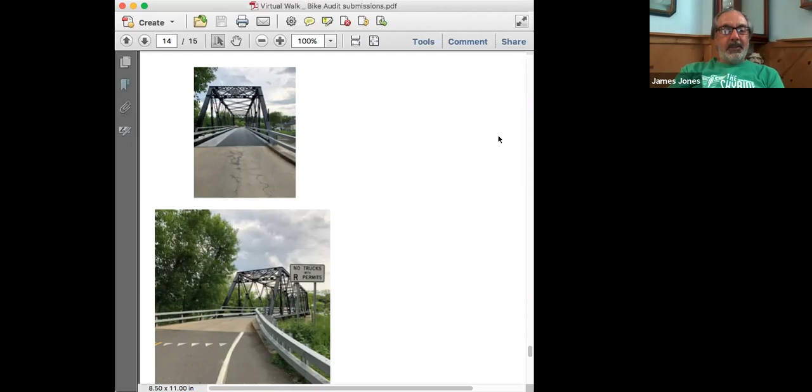And I think bollards could help. Yeah, sure, I'll make a note of that, great idea. Those are about $36 a piece, just bolt them right on. So, change the surface, look at bollards, and maybe some kind of warning signal.

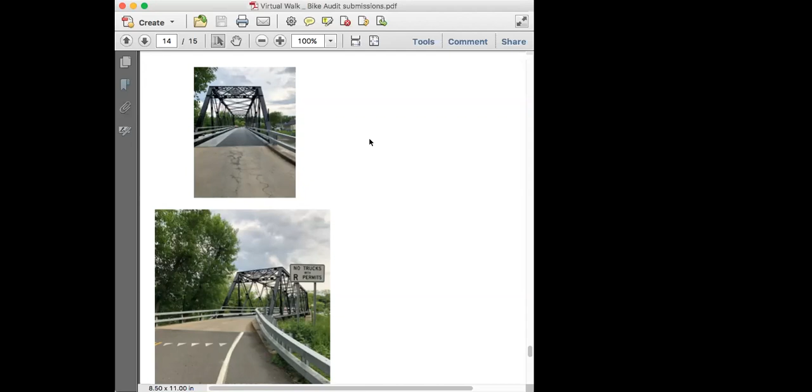How about carpet? How about carpeting? No, I'm kidding.

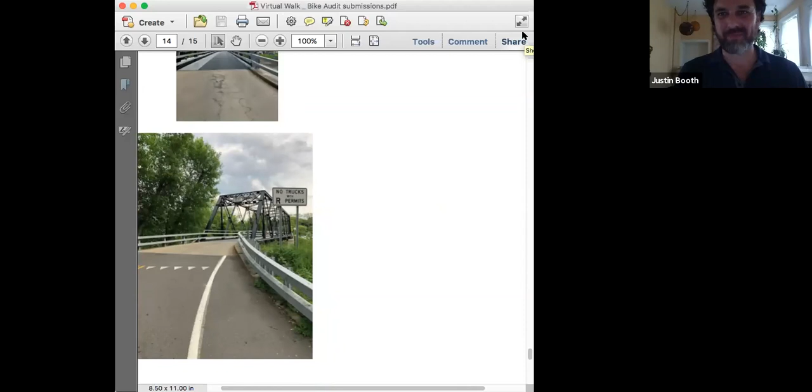We're just going to go through a couple more slides to close us out here and talk about a couple next steps.

So just a reminder, complete streets are for everybody. Business districts, cities, small towns and villages, whether you're 8 years old or 80, whether you ride a bike or you jog, we know that everyone walks. It's really about making sure that we are creating equity on our streets and helping build the quality of life that so many of us desire in our neighborhoods.

So we went through a lot of tools today, ideas and design guides that could help facilitate better infrastructure treatments to support safer travel for pedestrians and cyclists. Obviously this was a very 40,000-foot overview look at some of these different ideas and treatments. There's a lot more resources that we'll provide you in follow-up and design guidelines that can support and build upon the conversations we've been having today.

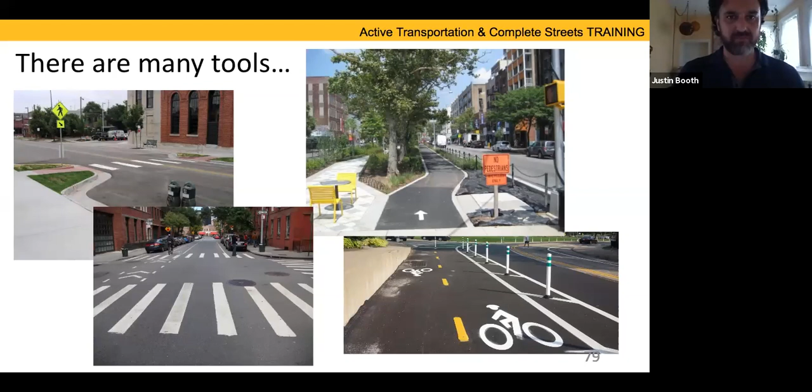I think it's important to remember to make sure we're not operating in our silos, whether we're thinking about how our streets function and the different users, but also making sure we're making those connections between the modes and connections to the different professions working to make our streets and communities safe, whether it's our traffic engineers, our planners, our community groups, and the like.

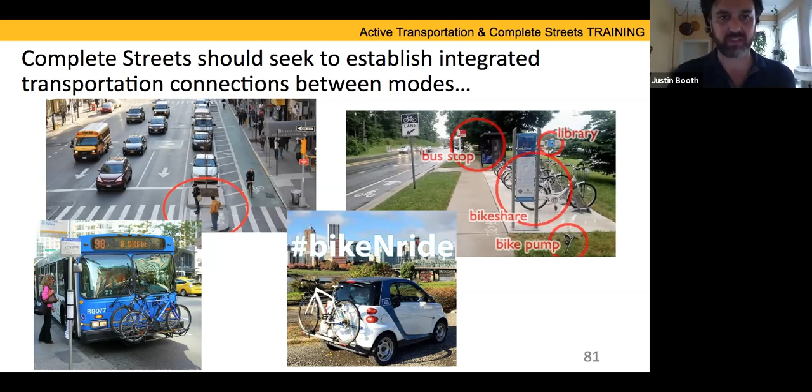So we talk about complete streets, and from a safety perspective, we're always looking at the hierarchy of users on our streets, making sure that all improvements are accommodating walking and biking, transit, other rideshare options, carpooling, and at the very end, of course, vehicle travel.

Implementation is not easy, and you need lots of players at the table. It's also important when we think about the public engagement process, how we are doing it in a way that is meaningful to the public, so the public feels like their voices are being heard.

Too often we will show up and do our 3 public meetings, introduce the project, talk about some of the ideas that have progressed, and then come back with the community with the final plan. We've been finding that process doesn't necessarily work. We need to do a better job of meeting people where they're at, making sure the issues they bring up are addressed in the plan, and working together to identify resources and develop policies to support implementation of these projects, whether short-term or long-term.

But for any of us to continue to get traction, it's important to evaluate and track our successes and set goals to achieve them - from crashes and fatalities to costs, economic activity, and healthcare. Too often we've focused on vehicle throughput, but our streets have so many other components and can provide so many opportunities.